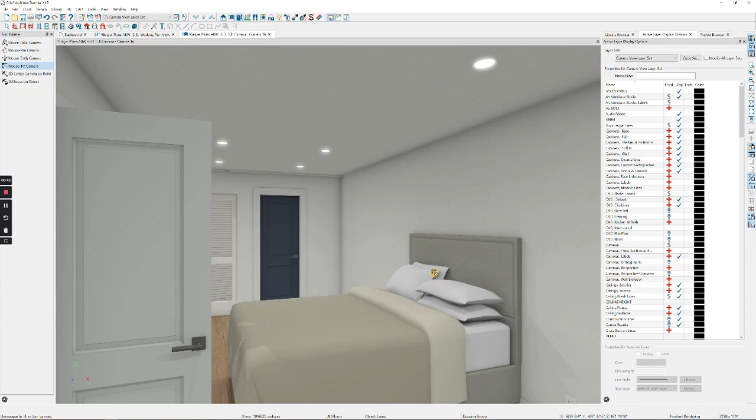So you can see the flat ceiling there. And I'm going to head over to this bedroom and see we've got the vault here that we want to bring across and match in that other bedroom.

So what I'm going to do is I'm going to go back over here. You can do this in plan or 3D, but I'm going to double click the room, or you can select it and then use the open object dialog box and go to structure and remove that flat ceiling.

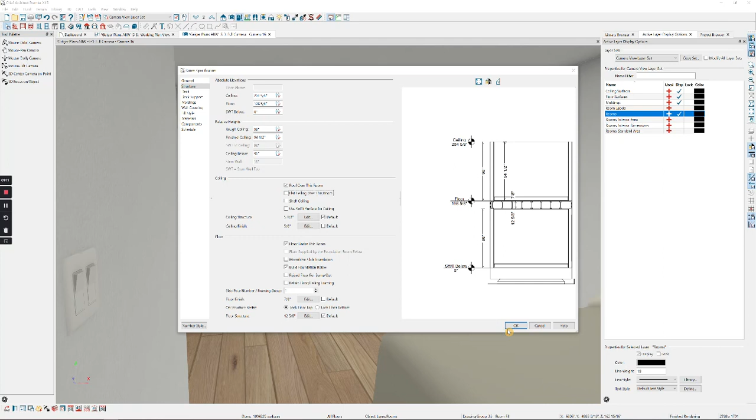Okay, and essentially that is the basis of it. You just always remove that flat ceiling, and now what you're seeing is the underside of your roof plane there. So if you are doing vaults, you typically have to have that roof built.

And then you can see on this side, it's not really matching up, so we're going to have to do a dropped ceiling there. And you can see a couple of other issues that have happened in this room. This is an attic wall that was above that ceiling plane.

And you can see it's not lined up properly. That's probably because this wall was adjusted after it was built, and then this one didn't move to match it.

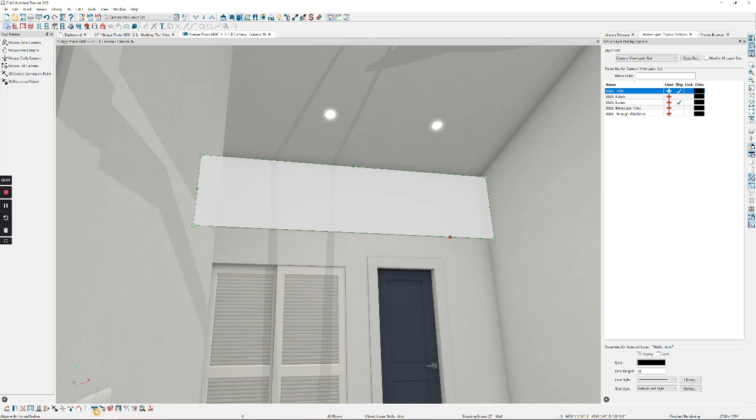So I'm just going to select it, and I'm going to use this tool here. That is the align with the wall below. So I just click that, and then that moved that wall, and now it's flush. So we have a solid wall there.

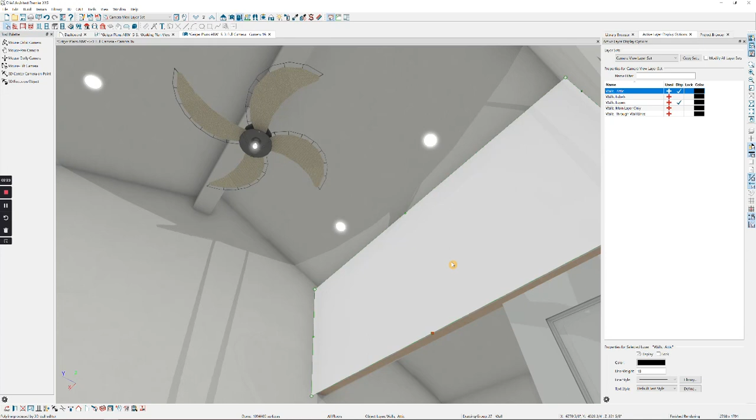And then you can see that the program built an attic wall on this side as well, and we no longer need that because we want this to be open, and that was built above that ceiling. So I'm just going to delete it. Hit the delete key and it's gone.

So the next issue that we can see is that this roof plane is not meeting up to the height here. So what we are going to do to fix that on the inside is we're going to make a ceiling plane, drop in a ceiling plane like this one. So I select that. You can see it's a sloped ceiling plane here.

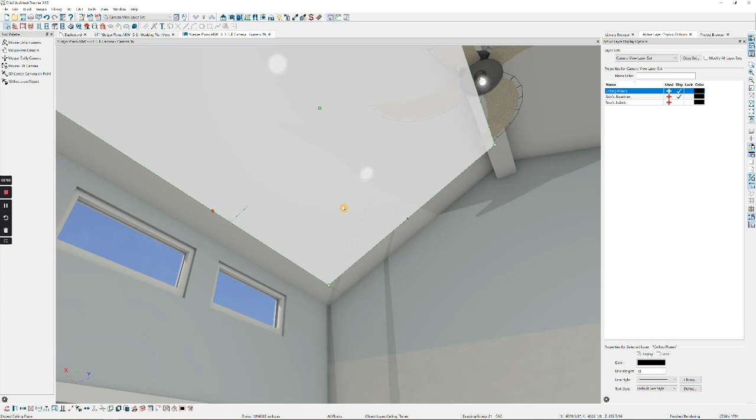I'm going to go into its dialog box and just look at its settings. So it's got a pitch of 6 and an inside wall height of 121 inches. So this measurement was taken on site to make this 121 inches. So always check your site measurement there.

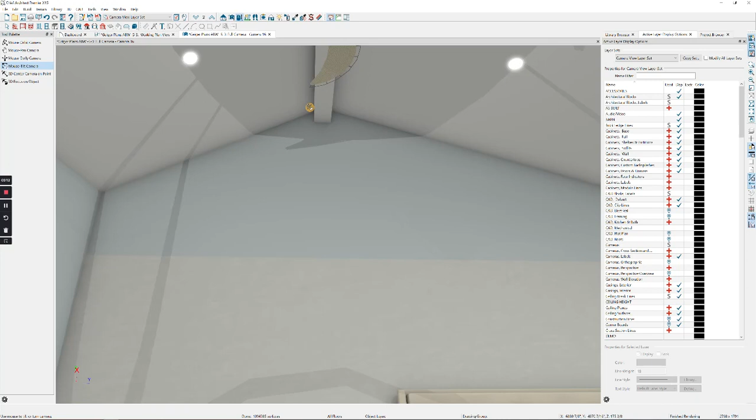And then you'd probably want to check the height in here, this height here. If you know those two heights, you don't have to worry about what the exact slope is, or if you know one of the heights and the slope, then the program will calculate the rest for you.

So let's look at that in plan again. So here's where that ceiling plane is. So I want one that matches here and meets up here again.

So what I could do is just copy and paste this one over and pull it down, but I'm going to show you how to do it if you didn't have this ceiling plane already there. And so the height at the wall here for it to match and meet up right here was at 121 inches, but across the hallway here, there's not a wall here. It continues to slope further down to this wall here to make that continuous.

So I'm going to use a CAD line, and I'm going to just snap it here into the corner there and pull that over just for reference. Yes, we'll just turn that on for now.

So that's just for reference of where that 121 inches is going to hit. So I'm going to grab, in my roof tools, the ceiling plane. I'm going to start it here, pull it across, and then pull it up to meet there in the middle.

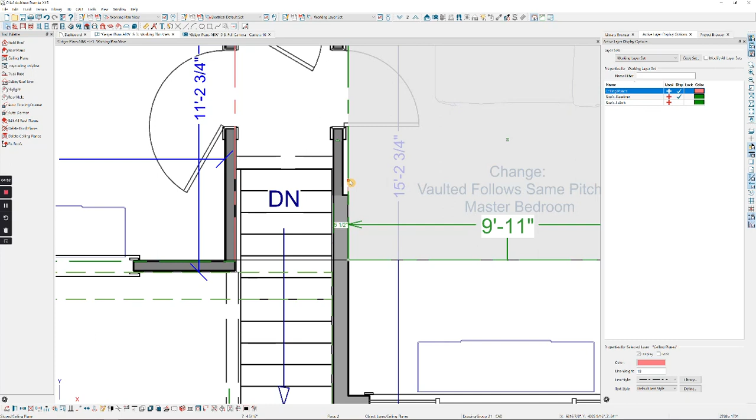And I'm going to pull it actually over a little bit here so that it goes all the way to that wall. And then I'm going to open up its dialog box.

And make its settings. Right now it's set to absolute. That means all of its heights are coming from your 0 level, which is probably where your first floor is sitting. So you want it from your floor. In this case, we want to change that, make sure that's to floor.

And then that pitch is going to be 6 to match the other one, and then our bottom height at that point is going to be 121. So those are locked in. I'm going to hit tab, and so that matches up with the other one.

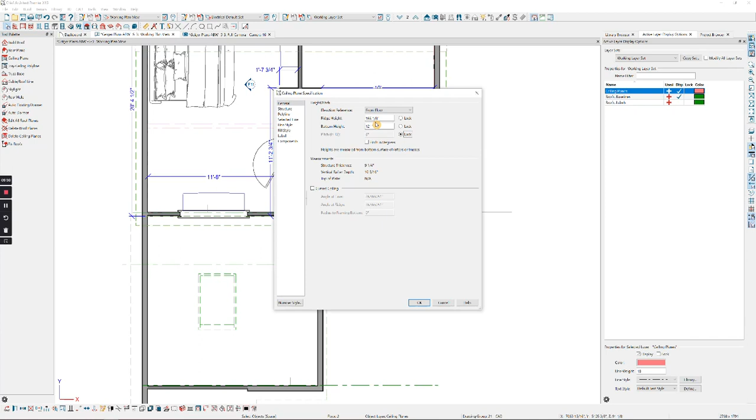So I'm going to hit OK, but obviously we don't want our ceiling to stop here. So now that I know that the height here is going to match this wall here, and that matches up there, I'm going to just go ahead and pull that the rest of the way down.

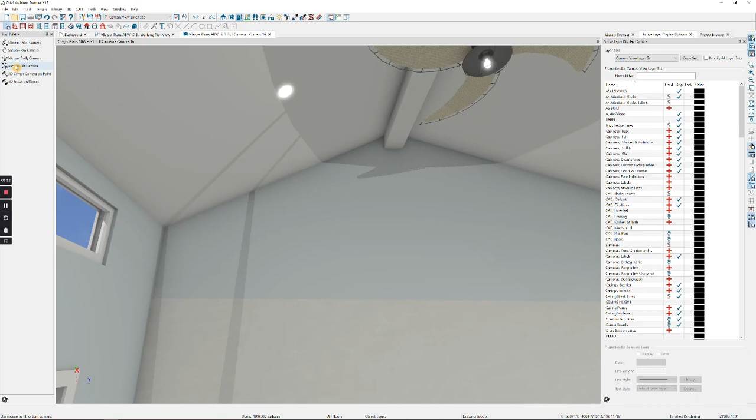Now I'm going to look at it again in my 3D view. Go back across the hall here. And there we go, there's our ceiling plane. It closed that gap there, and it meets up nicely above that window there.

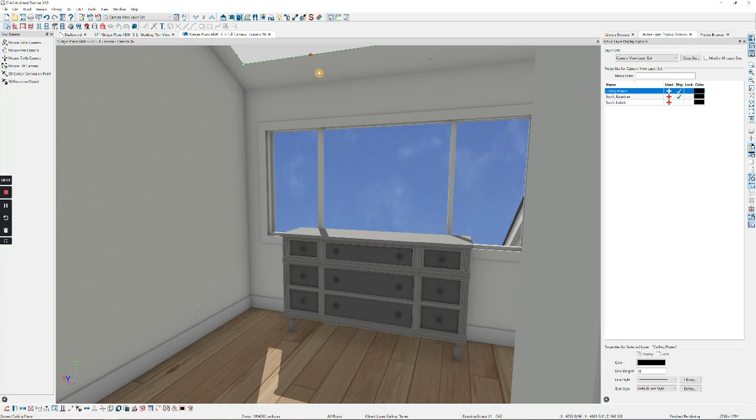You, of course, are going to want to check your site measurements here and make sure those heights are correct. Now let's see where the bottom of that is sitting now. It's sitting right at 96 inches, so that's exactly an 8-foot ceiling here. So that should be correct.

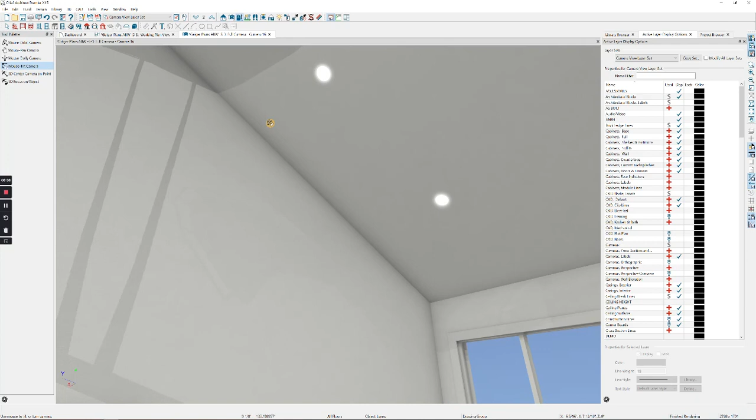But you definitely want to check that height measurement and make sure of that, especially if you're doing window treatments and things there, you need that height. So that is how you change the flat ceiling to a vaulted ceiling. Thank you.